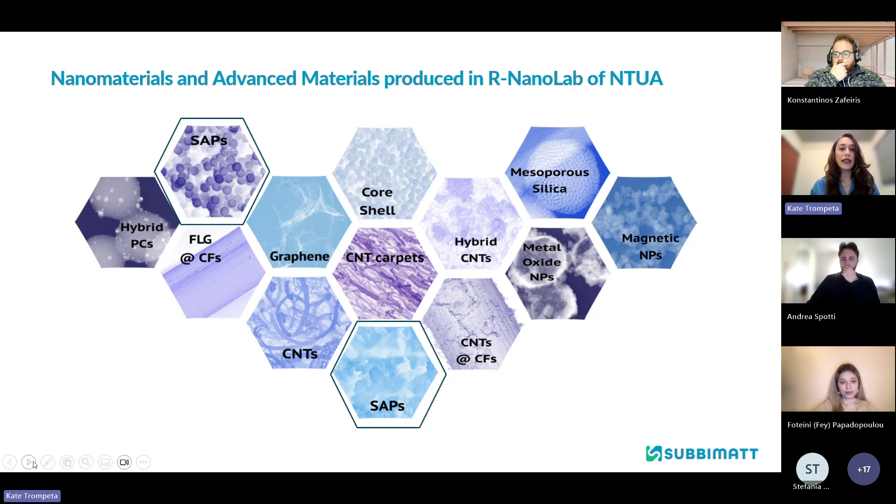So we started with this idea to have a smart textile that can control humidity. And of course, we need specific characterization of the performance of these materials and also for the smart textiles. That's why we also exploit some of our capabilities in materials characterization, specifically structure and surface analysis and several of our microscopies, to assess the performance of the materials. Today we will speak about the rheology measurements. Konstantinos will be the speaker for this testing, and I will show you some of our wettability testing at the end of today's webinar.

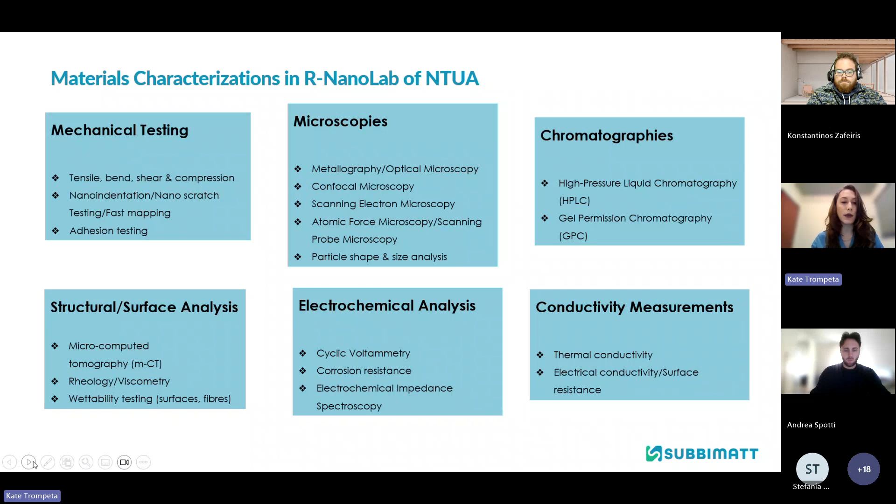So why use thermoresponsive hydrogels on textiles? Temperature is attractive as a trigger because it's simple, reversible, and directly relevant to wear and comfort. A hydrogel can translate the thermal stimulus into a change in water content and conformation. That molecular change can be felt macroscopically as a change in wetting, permeability, or adhesion. So the textile stops being just passive and starts responding to its environment. What we do is exploit the temperature input, the differences in our body with respect to the environment.

So to take, for example, the heat from our body, which is an easy and reversible trigger. The hydrogel can respond, so it can swell or shrink, and also have some surface energy shifts. With this, we have an effect on the textile, and this changes its wetting, its permeability, its adhesion, or the transport of air and humidity through its pores.

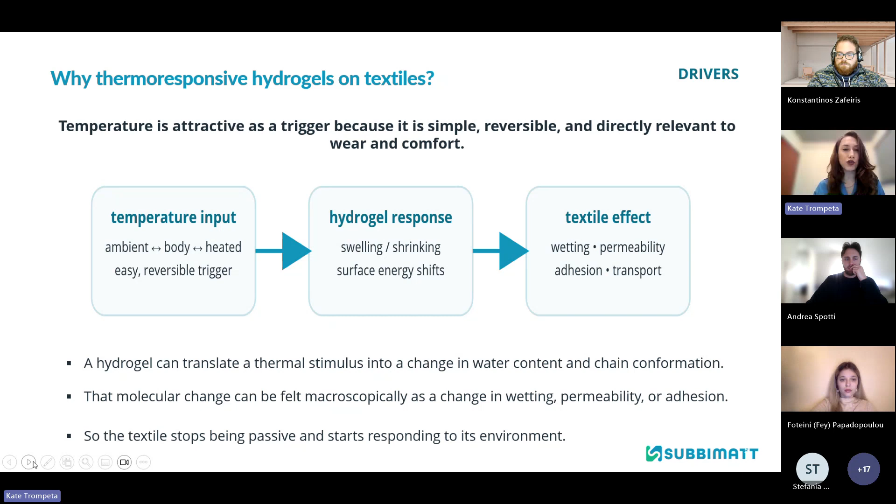The necessary testing is about the textile performance after its functionalization with any material, for example, here the NTR hydrogels. So what we want to check is the contact angle versus temperature and time, its water uptake or water spreading or wicking behavior, the air and water vapor permeability after its coating. And actually, this is the work of Centexbel, the SUBBIMATT coordinator, that is checking the air and water permeability, the repeatability of switching of the actual fabric, and the performance under realistic humidity and bending.

A useful smart textile is not only responsive, it must remain responsive after handling, moisture exposure, and repeated thermal cycles. That's why we need to fulfill the performance and the functionality, but of course, to withstand washing, abrasion, and to check the coating retention, also to have tensile and flexural response during handling, compatibility with other textile functions, also to ensure that the aging stability during storage and use can be fulfilled, and of course to fulfill the safety, comfort, and biocompatibility when this is relevant.

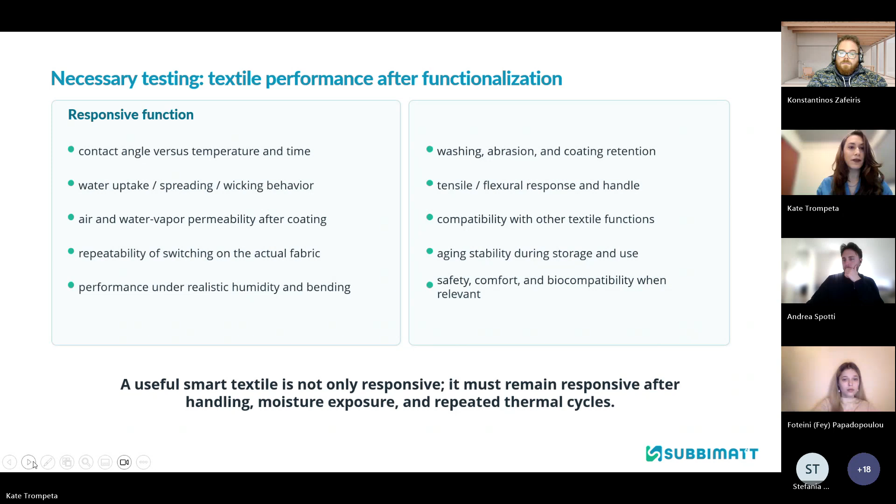I would like to close this introduction by introducing the lower critical solution temperature, which is the property that we are studying actually. What we need to quantify in the responsive phase itself: first of all, the swelling ratio or thickness as a function of temperature, the response time and reversibility over many heating cooling cycles, the thermal transition, chemistry, and morphology after cross-linking, and all these are connected, as you may see, with different parameters. For example, the swelling ratio is a function of temperature. Similarly, it's also affected by the thickness because it shows how much the hydrogel swells or collapses.

The response kinetics are also really important because they show how fast the coating switches. Also, the morphology and chemistry of the fabric itself and also the coating show whether the network is intact after processing. And we have also the cycling stability to show us if the response survived after repeated triggers. Where is the LCST or effective switching window, which is something that can also be identified by the rheological measurements that will be presented next. And also to answer the question on how much coating remains after swelling and drying, which is also a matter of stability.

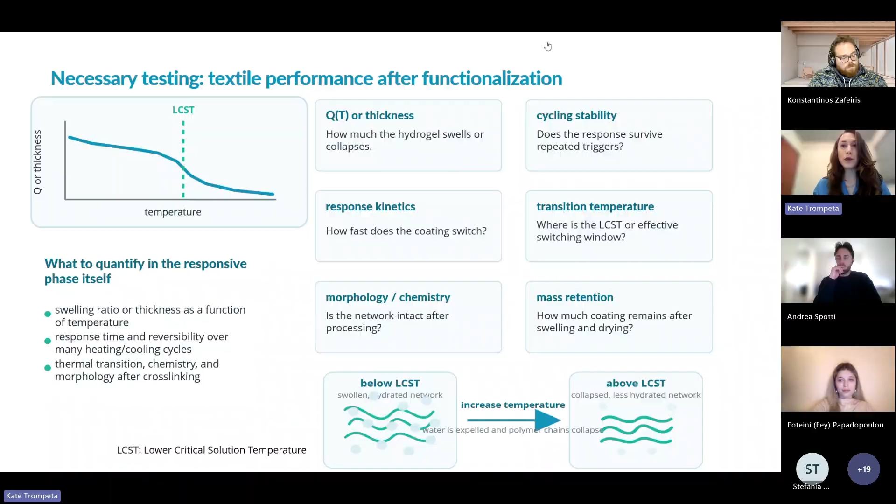So now I will give the floor to my colleague Fey, who will present how she has synthesized the NTR hydrogels and how she was able to identify the LCST. So thank you from my side.

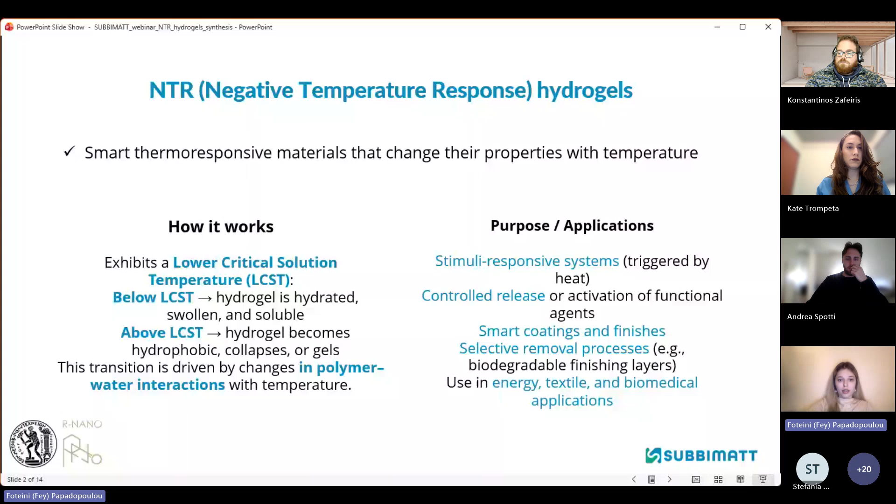So in order to synthesize the NTR bio-based hydrogels, we first need to think how are we gonna design those experiments. So we started with a bio-inspired design approach, selecting the proper raw materials, and formulating the pathway in which we're gonna synthesize and then assess those hydrogels. Evaluation was a very important step in that. Evaluation of the LCST, the solvent systems, the temperature, the processing conditions, in order to validate the material performance and then consider the scale up.

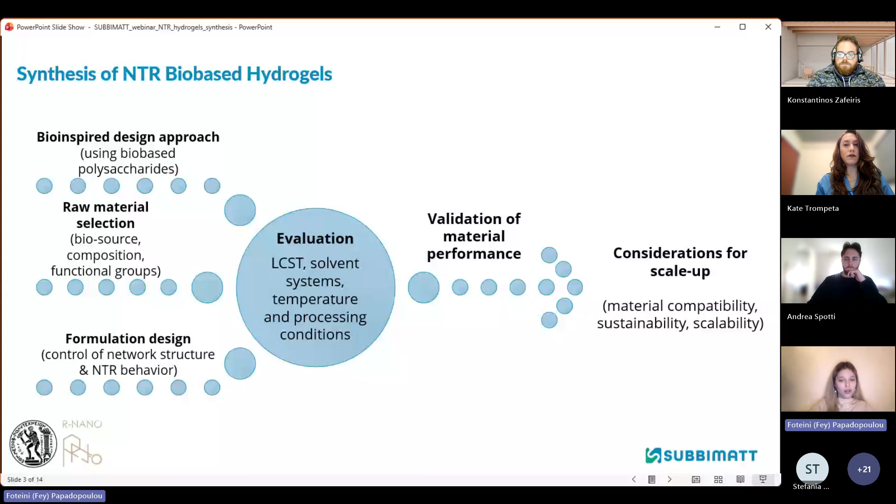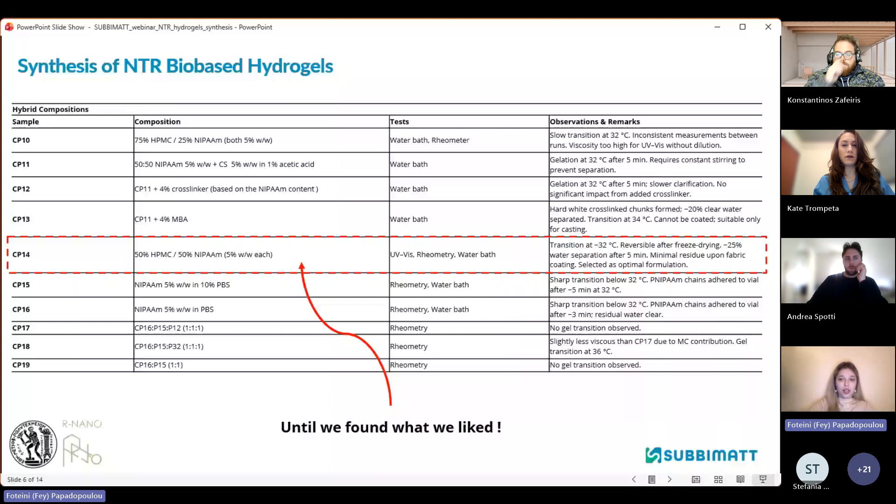So we started testing, and we did a lot of testing, and we continue testing, as you see, until we find a synthesis that we liked. The synthesis was composed of NIPAAm, or N-isopropylacrylamide, which is a thermosensitive polymer that changes behavior with the temperature. It has a very narrow temperature range. It's about 28 to 34 degrees.

Free radical polymerization forms the final network, and for this reason, we have APS as the initiator and TEMED as the accelerator. The initiator and the accelerator are vital because elevating the temperature above the NIPAAm and HPMC transition temperature results in a collapsed polymer network that can't be further processed. So keeping the temperature low, room temperature ideally, or even lower, forms NIPAAm polymer, and mixing it with HPMC hydrogel, we can actually make this hydrogel that looks like this.

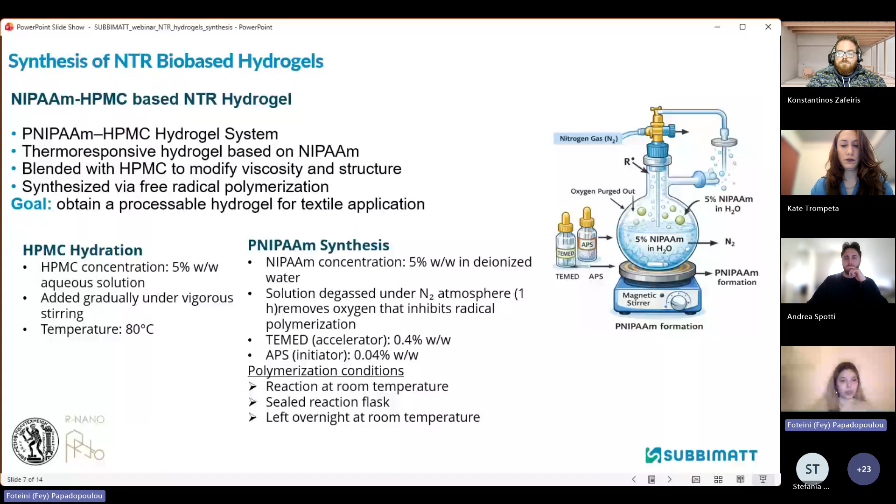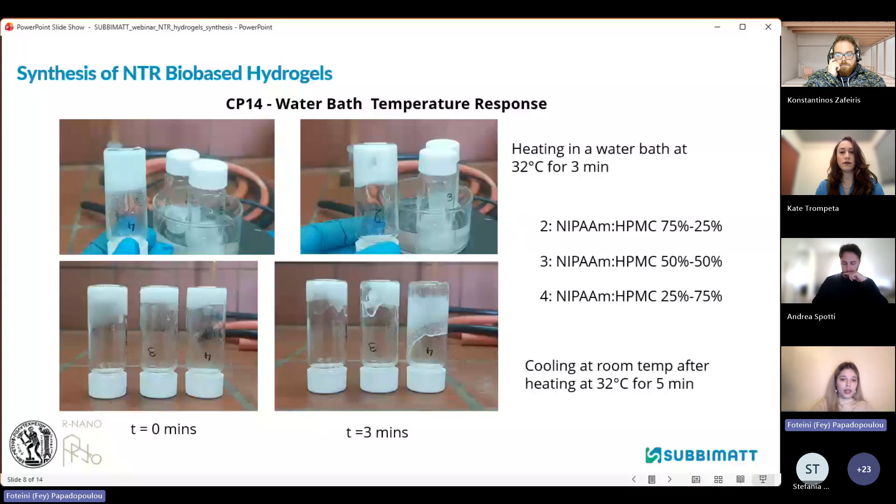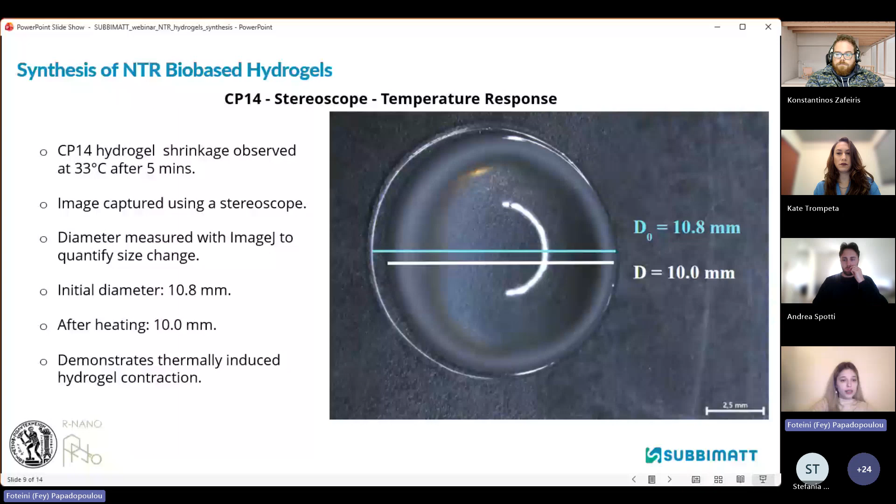So here we have a little droplet under a stereoscope in order to assess this transitioning in this gel formation. We have here a little time lapse, let's say, of the hydrogel during heating. At room temperature, the gel is fully swollen, and as temperature reaches 33 degrees, the hydrogel gradually contracts, and this becomes more pronounced after 1 minute and even more after 5 minutes. This demonstrates the thermoresponsive behavior that our chosen hydrogel exhibits.

And okay, we did it. We tested it. We did multiple variations of that. But what about the procedure? Is it robust? Is it reliable? Can NIPAM and HPMC be mixed thoroughly to replicate this result over and over again?

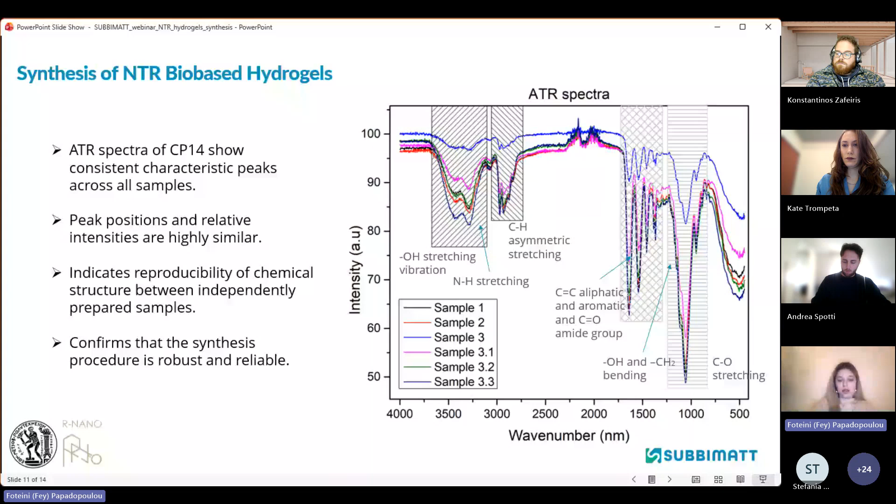And now comes a bit of a difficult issue. How can we graft and secure this hydrogel that we made onto the fabrics? The first route we chose was just to disperse with a cross-linker and see how the fabric reacts. That was not enough. So we tweaked our coating route, let's say, and we immersed our fabrics in the cross-linker, which is MBA.

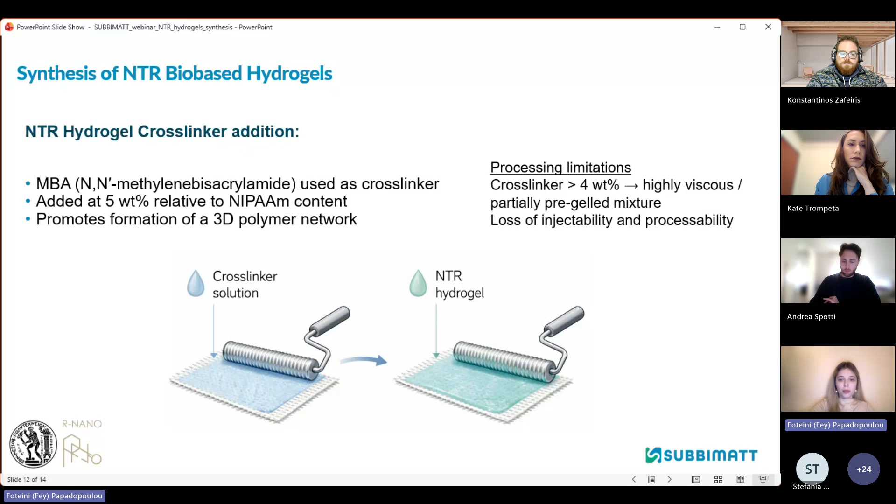We used the relative amount of gel that each fabric absorbs. We did testing on that, and we found out how much the fabric absorbs, and then we used 5% of this onto the fabric directly. Then we layered the hydrogel on top and let it dry completely. This resulted in fabrics that are coated, with the hydrogel fastened onto the fabric instead of just on itself.

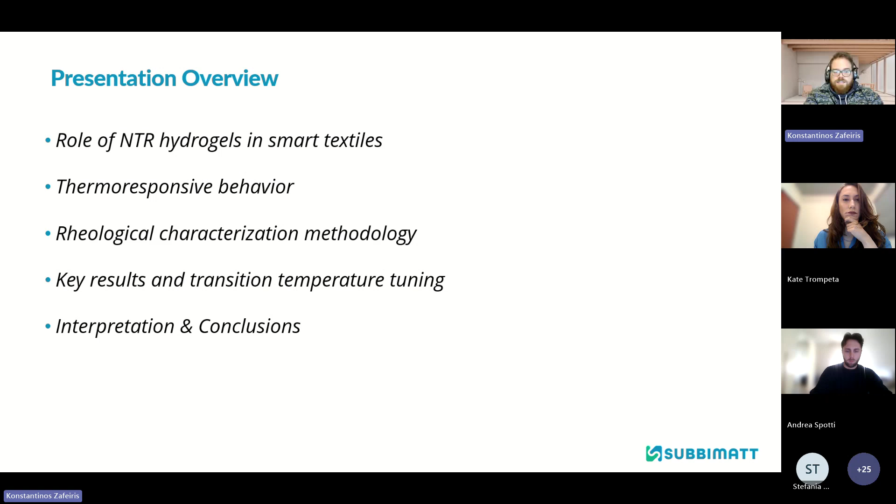So good afternoon, everyone. My name is Konstantinos Zafeiris, and I will present the rheological characterization of the NTR hydrogels developed within the SUBBIMATT project. So I will start with the role of these hydrogels in smart textiles and their working principle, and I will afterwards introduce the rheological methodology that we used in their characterization. And next, I will present the experimental results, starting from fully bio-based systems and the transition to hybrid formulations. Finally, I will discuss the interpretation of the results and some takeaway messages.

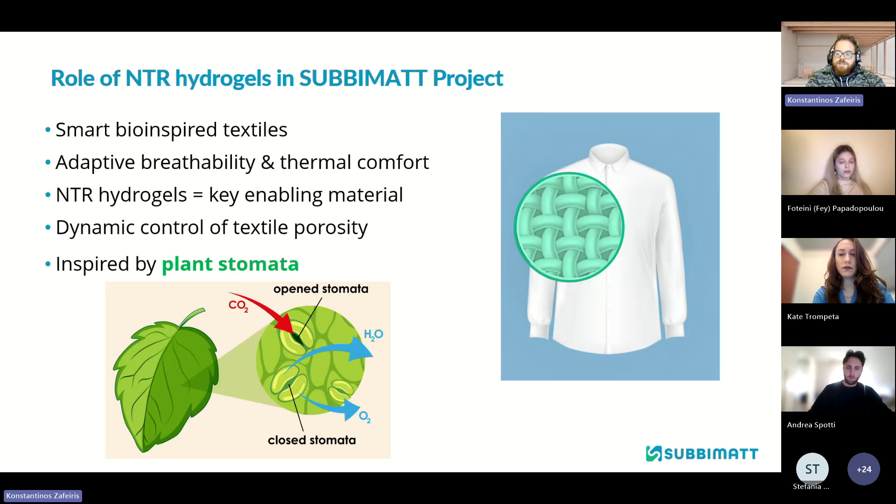So in SUBBIMATT, NTR hydrogels are a key enabling material for smart bio-inspired textiles. They allow dynamic control of the textile porosity, enabling adaptive breathability and thermal comfort. Now, this concept is not new. It's inspired by plant stomata, which regulate gas exchange through opening and closing mechanisms. Now, the hydrogel function is based on the lower critical solution temperature, as we referred before.

So below this temperature, the hydrogel is swollen and, when in a fabric, reduces porosity and retains heat. However, above the lower critical solution temperature, the hydrogel shrinks, porosity increases, and so does breathability. For textile applications such as SUBBIMATT, the critical requirement is that this transition occurs within a range of 25 to 32 degrees Celsius. Now, before presenting the experimental methodology and results, let me briefly introduce some basic rheological concepts that are relevant to hydrogels.

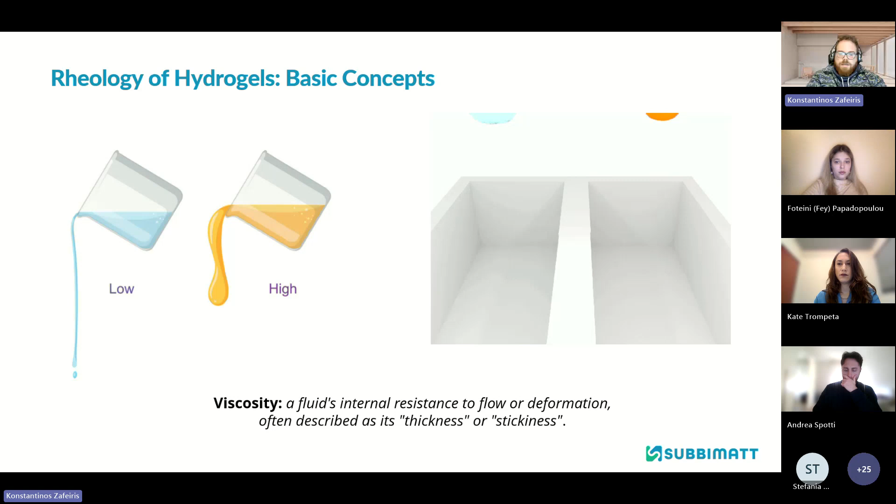Now, rheology is the study of how materials deform and flow under applied forces. Regarding viscosity, it's an internal resistance to flow or deformation, often described as a thickness or a stickiness. So in other words, it represents the friction between molecules in a liquid or gas medium, with high viscosity fluids like honey, for example, flowing slowly, and low viscosity fluids like water flowing quickly. Now back to the hydrogel part.

Hydrogels are viscoelastic materials, meaning they exhibit both solid-like and liquid-like behavior. Now this behavior is quantified using two key parameters: the storage modulus, we call it in brief G prime, that represents the elastic or solid-like response, and the loss modulus G double prime, which represents the viscous or liquid-like response. Now, when the storage modulus is higher than the loss modulus, the material behaves more like a solid, indicating the presence of a stable network. On the contrary, when the loss modulus dominates, the material behaves more like a liquid.

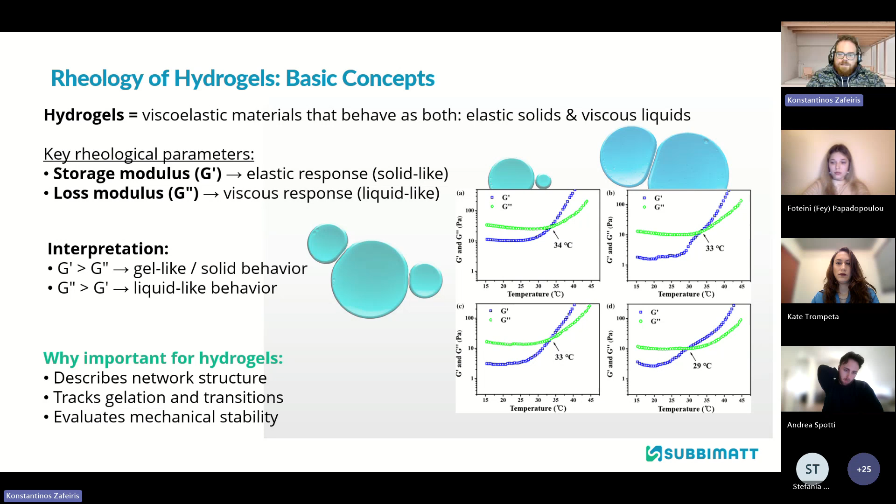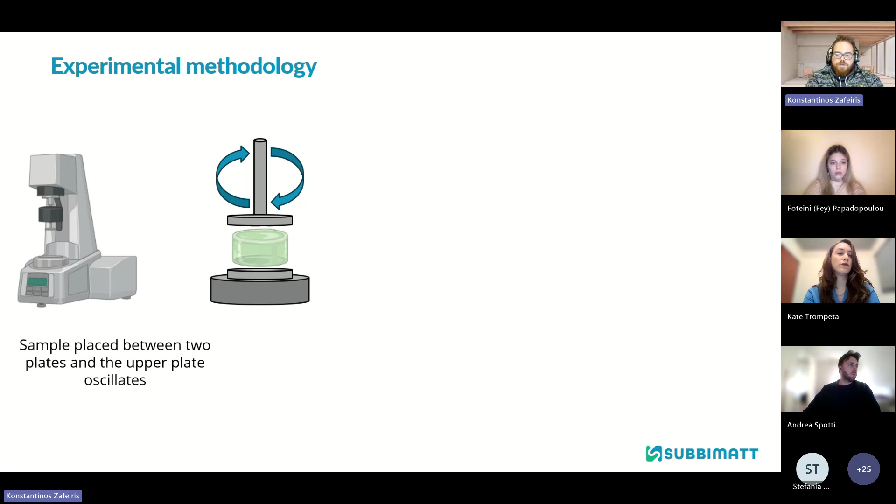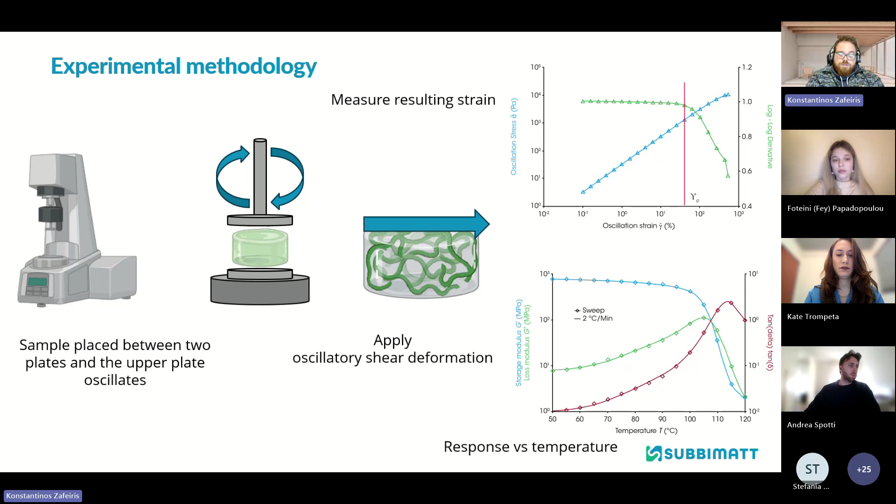Now, these parameters are particularly important for hydrogels as they allow us to understand their internal structure, monitor transitions such as gelation, and of course evaluate their mechanical stability under different conditions. Now, in our experiments, we use a plate-to-plate geometry, as we call it. The hydrogel sample is placed between two parallel plates, and the upper plate applies a small oscillatory motion. This creates a shear deformation in the material, and the instrument measures the resulting stress response. By controlling parameters such as strain, frequency, and temperature, we can probe the material in different conditions. From this response, we extract the storage and loss moduli, which describe the mechanical behavior of the hydrogel.

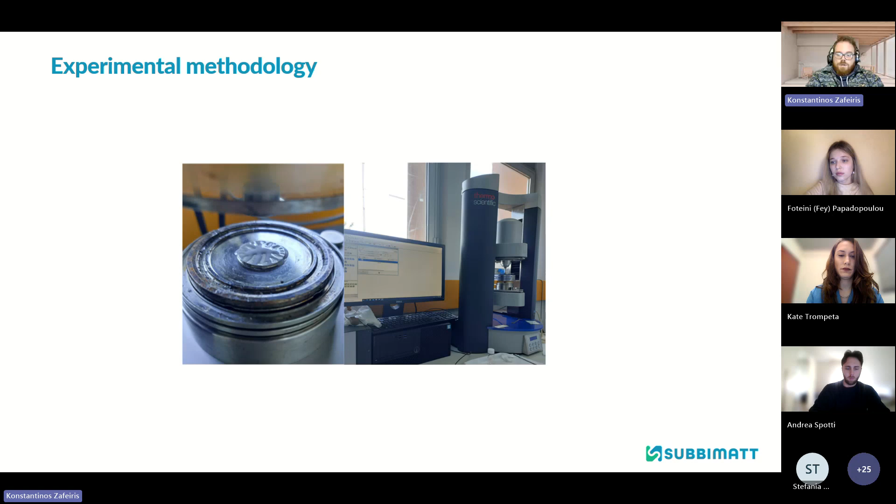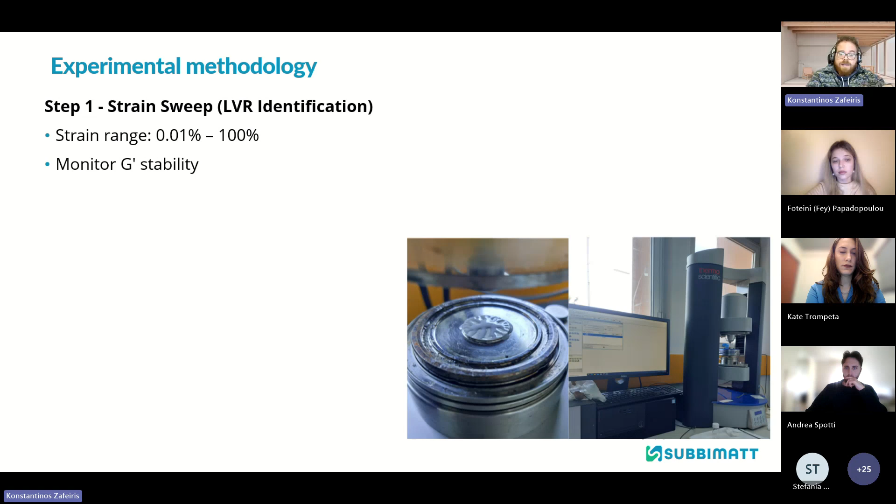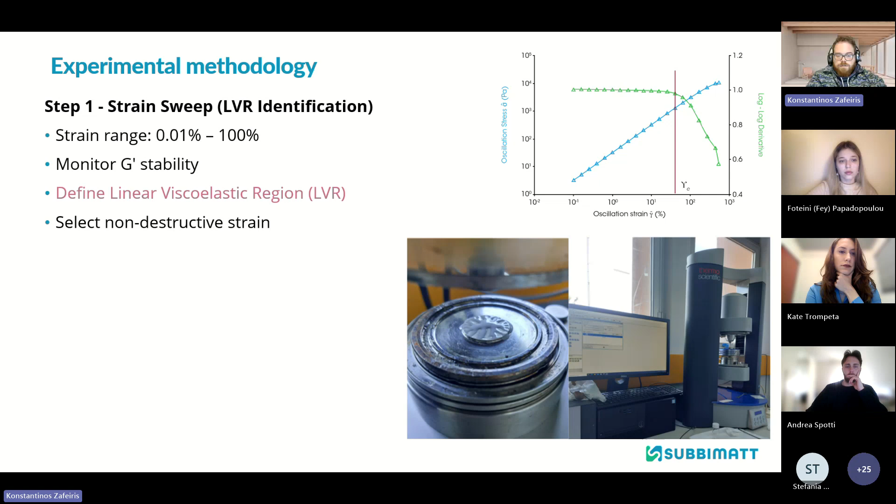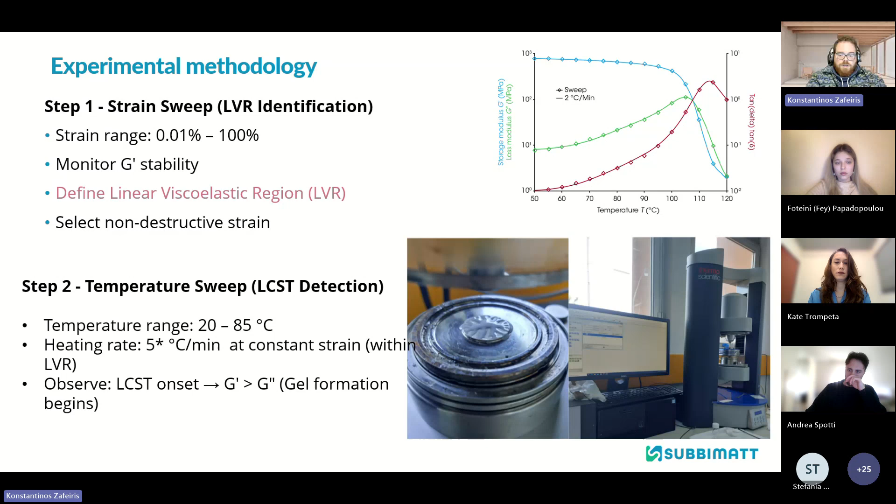We monitor the storage modulus, G prime, which represents elastic behavior, and of course the G double prime, hence the viscous behavior. Now, the transition is identified through changes in these moduli as temperature increases. So let's go to the good part, our results, starting from the fully bio-based systems.

As you can see in this slide, at low temperatures, all systems comprising either methylcellulose, hydroxypropyl methylcellulose, or chitosan exhibit low storage modulus values, which indicates weakly structured networks. As temperature increases, a sharp rise in G prime can be observed in some cases, which corresponds to the thermally induced gel formation. However, the key observation here is that this transition occurs at relatively high temperature, typically between 50 to 70 degrees Celsius, depending on the composition of each hydrogel.

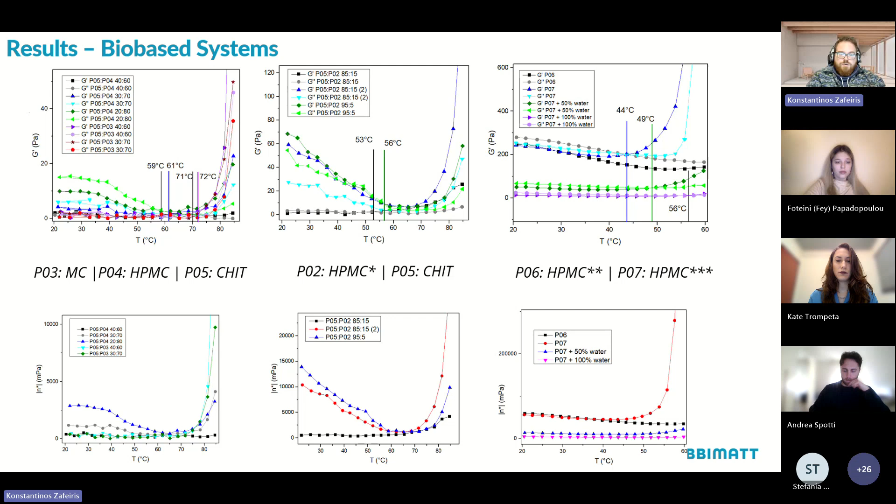Although blending with chitosan slightly affects this transition behavior, it is not sufficient to shift the lower critical solution temperature into the desired temperature range of our application in the SUBBIMATT project. Also, on the bottom of the slide, there are some viscosity data that also confirm the trend we referred to before, showing a corresponding increase at the transition point of the hydrogels. So overall, while fully bio-based systems are proven to be thermoresponsive, their transition temperature is too high for our application, highlighting that we need to experiment even further with our design strategy.

So speaking of challenges, this is an interesting challenge that arises from the previous slide and the rheological measurement. So hydrogels comprised solely of bio-based materials have transition temperatures that are above 40 and 50 degrees Celsius. Even by tinkering with the formulation with chitosan, we could not reduce this transition temperature drastically. So to address this, we followed, let's say, a hybrid approach, and we kept the polysaccharides in our recipes. However, we added a synthetic ingredient, as Fey already mentioned.

So we had a polysaccharide backbone consisting of cellulose derivatives and chitosan, and combined it with N-isopropylacrylamide. So the goal was to achieve precise control of the thermoresponsive behavior while maintaining as much bio-based content as possible. And our compromise was a very good ratio, 50% bio-based content and 50% synthetic. So to overcome these limitations, as we said before, we experimented with these hybrid formulations, and we already mentioned that this was the top performing one and the most promising one in terms of the phase transition temperature.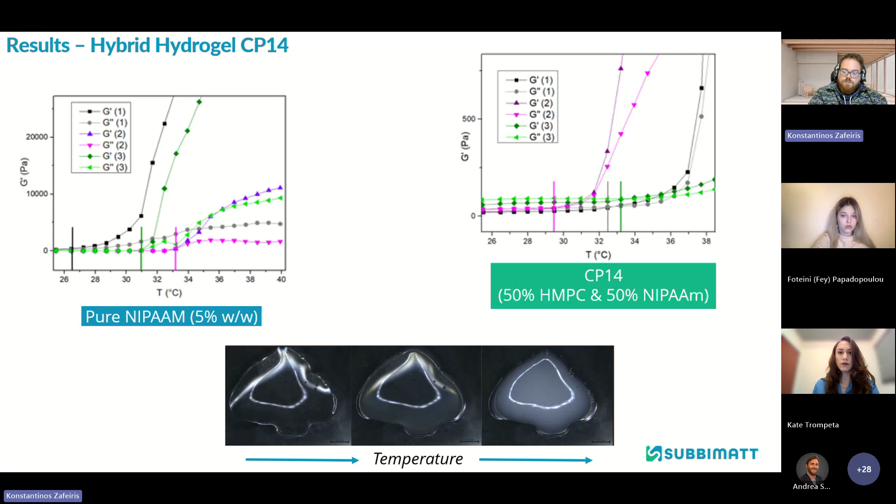So the slight variation that someone can notice in the transition temperatures in the hybrid formulation can probably be attributed to factors such as the inhomogeneity of the sample or some thermal gradients during the measurement itself. So overall, this system successfully shifts the thermoresponsive behavior into our application range. So to sum things up, the observed transition is driven by changes in polymer-water interaction. As already noticed, as temperature increases, the network becomes less hydrophilic, leading to shrinkage and changes, of course, in the mechanical

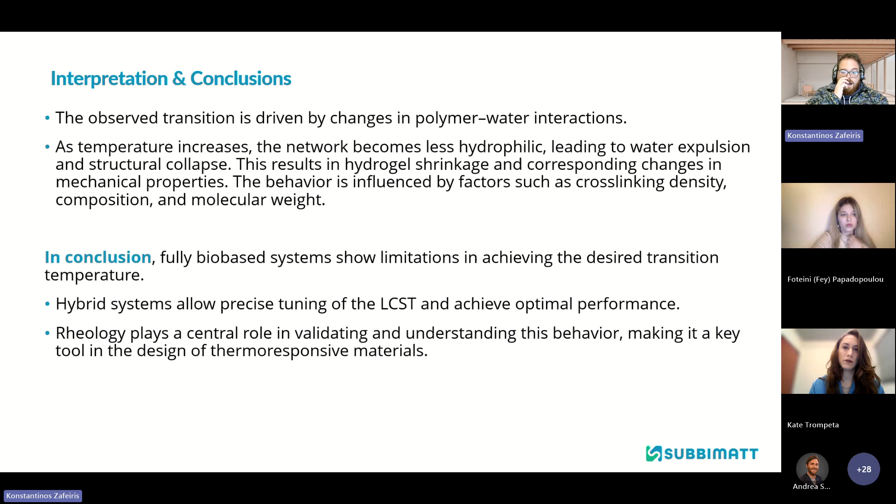properties of the formulation. So in conclusion, fully bio-based systems show limitations when we aim to achieve our desired transition temperature, which is in fact close to the regular body temperature. However, hybrid systems allow precise tuning of our lower critical solution temperature and improved performance. And of course, last but not least, rheology plays a key role in understanding and validating the behavior of these thermoresponsive materials.

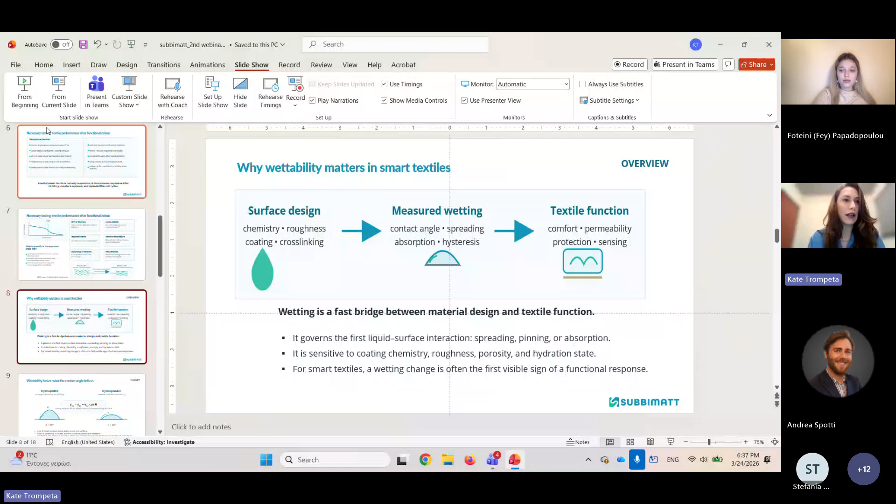You will now have a look at the wettability testing that we do in the SUBBIMATT project. So why does wettability matter in smart textiles? Wetting is a fast bridge between material design and textile function. It governs the first liquid-surface interaction. So we are talking about spreading, pinning, or absorption. It is sensitive to coating chemistry, to the roughness of the textile and the coating, to porosity, and to the hydration state.

For smart textiles, a wetting change is often the first visible sign of a functional response. So we need to study the surface design, its chemistry, the roughness, as mentioned before, of the fabric itself or the coating, and the cross-linking of the material on the surface of the fabric.

So how is wetting measured? It can be measured through static contact angle measurements, through the spreading, so this is a dynamic testing, on its absorption or possible hysteresis. With this, we could understand the textile function to quantify its comfort, its permeability, possible protection, and also some sensing in some cases.

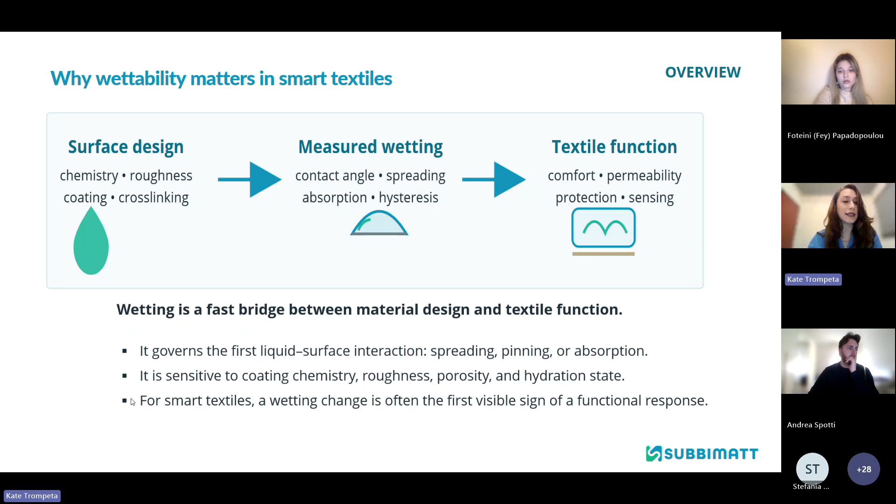So we need to know a few things about the wettability basics and what actually the contact angle tells us. All the phenomena is guided by the Young equation. So actually we separate the materials to hydrophilic or hydrophobic. We could also have superhydrophilic or superhydrophobic cases. For a hydrophilic material, we have stronger solid-liquid affinity. And for a hydrophobic material, we have weaker solid-liquid interactions.

The Young equation actually combines the surface tension of the solid with the liquid, or the solid with the gas, or the liquid with the gas. So actually we are studying the triple point within three different phases of materials. And the connection point of all of them is the theta angle that can be measured through the contact angle measurements. A low theta means that the liquid spreads more easily across the surface. A high theta means that the spreading is limited and the surface appears less wettable.

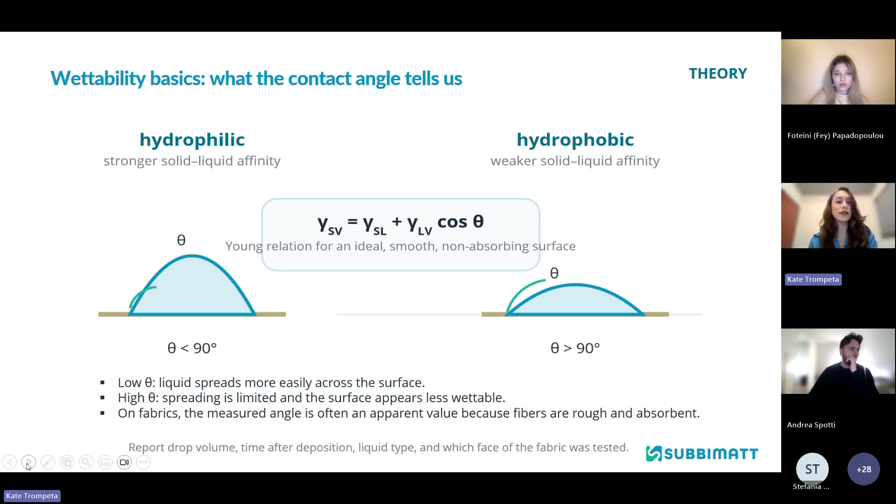On fabric specifically, the measured angle is often an apparent value because fibers are rough and absorbent. So every time that we are making a measurement, we need to report the drop volume, the time after deposition, the liquid type, and which face of the fabric was tested. For you to understand the theta, it's actually the tangent on the triple point between the liquid, the solid surface, and the air.

So how do we do this type of measurements, especially on textiles? We have a flat surface where we place on it the textile. We try to keep it flat, and then we dispense a defined droplet. We need to calculate the volume of this droplet in order to be able to drop and have a sessile drop on the surface of the fabric. Afterwards, we capture the droplet profile and try to fit the angle with a specific software on the machine that we have. Most of the times we have to fit both the left and right contact angle.

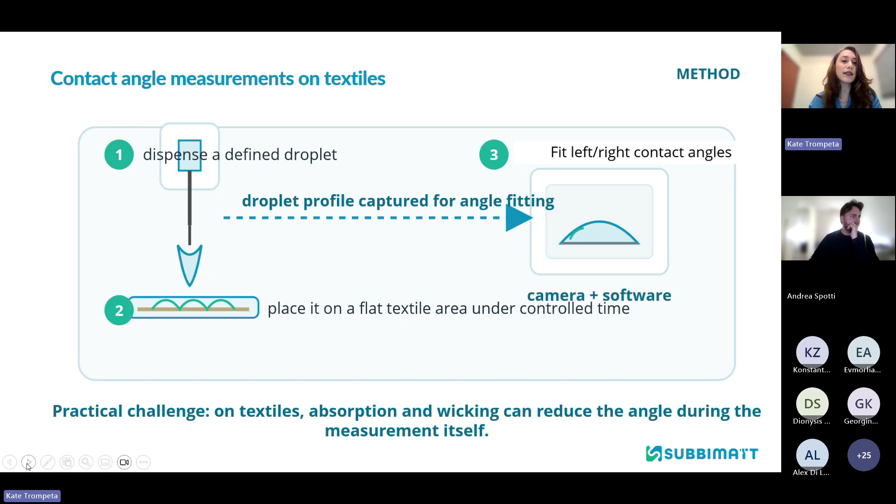On textiles, we face a practical challenge, which is the absorption and wicking that can reduce the angle during the measurement itself. So actually, we cannot always have static measurements, but most of the time dynamic ones, and study the phenomenon at specific time intervals.

Let me see. Yep, let's proceed to the next.

So what controls the measured angle? First of all, the surface chemistry. Polar groups raise affinity to water, while non-polar ones reduce it. Then it's the roughness and porosity of the fabric. The fabric texture amplifies apparent wetting and can accelerate imbibition. The coating continuity is also very important. So if we have a patchy coverage, this can give a mixed wetting. Also, stronger cross-linking can stabilize the finishing.

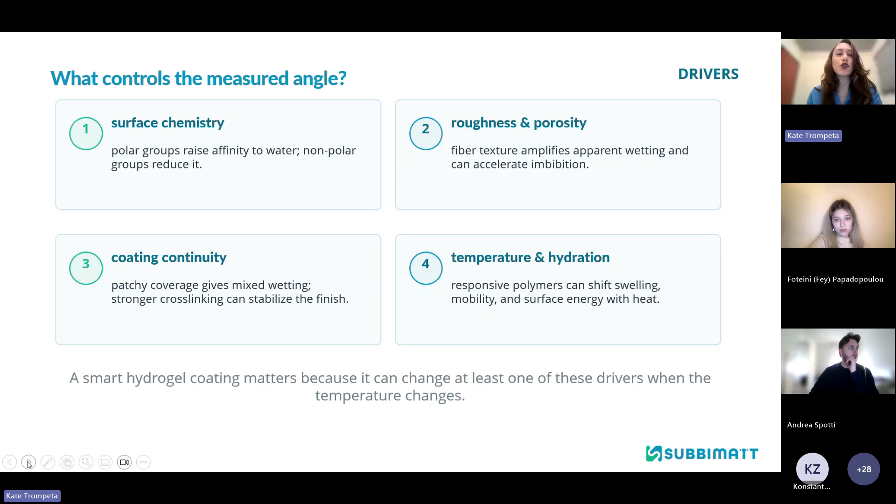We start with the dosing, which means that we are using a syringe to deposit a controlled volume, typically from 1 to 20 microliters of the testing liquid. Most of the cases, this is water. If we want also to study other phenomena, we can use some specific solvents, especially when we want to determine the surface free energy. So we are spreading or dropping the drop with a specific syringe or a specific volume on the surface that we want to study.

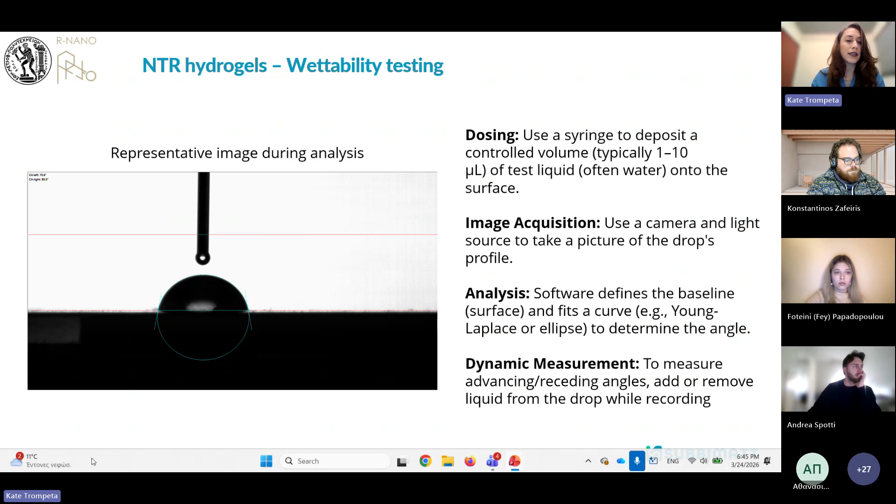In a dynamic measurement, we need to measure the advancing or receding angles and add or remove liquid from the drop while recording. That's why in these cases we're taking a video and then try to make calculations during the whole procedure. So what we could see also in our case in SUBBIMATT: in the first case, when we have a fabric sample that's not treated, you see that we can have a drop at 0 point, and after a while, the water is totally absorbed, so we cannot observe the drop anymore.

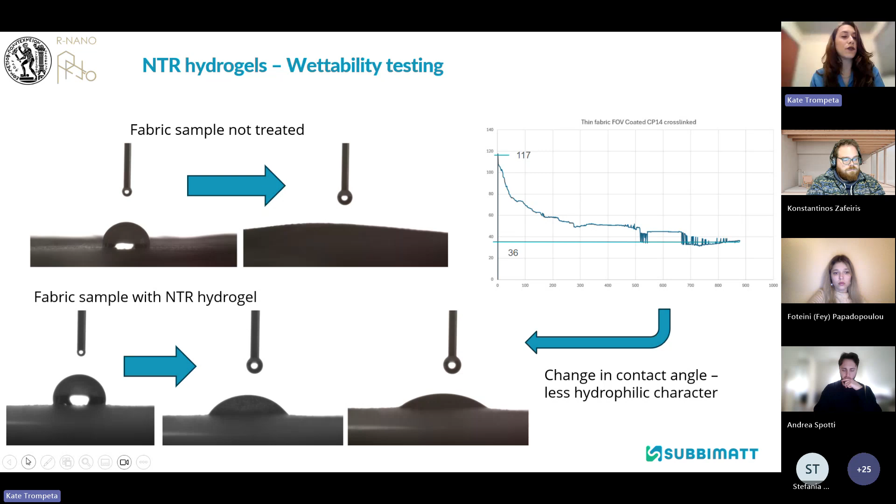When we have coated the fabric with the NTR hydrogel, we can see that we have like a waterproofing function. So in the beginning, the droplet has been absorbed, but as the time passes, it still remains on the surface. So the change in the contact angle that can be recorded also in the diagram shows us the hydrophilic or hydrophobic character versus time. So it's a dynamic measurement. By this, we are able to see if our coating with the hydrogel was effective, not only in terms of their functionality, but also waterproofing if this functionality is also needed.

So we would like to close this presentation with some applications for smart textiles with NTR hydrogels to understand a little bit why and where we can use this type of materials. And this is, for example, in adaptive moisture or heat management. Thermally triggered wetting can help textiles regulate liquid spread and comfort. On controlled permeability or filtration, where responsive coatings can tune passage of water or other fluids with temperature.

On biomedical dressings and transdermal systems, where hydrogel-coated textiles can support moist interfaces and on-demand release concepts. And on wearables, sensing and actuation, where temperature-sensitive layers can combine with conductive or structural textile functions. And in this case, these materials can be combined also with carbon-based nanomaterials.

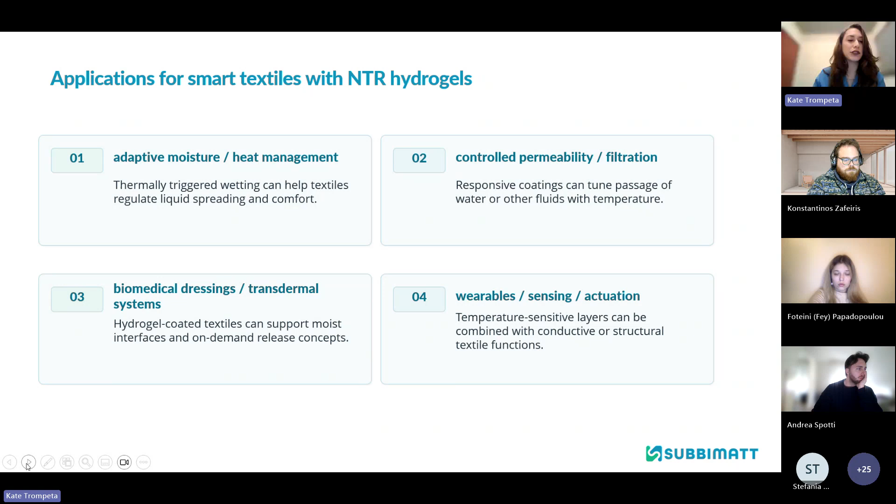So the take-home message of today's webinar is that contact angle is a simple but powerful surface readout. It gives a fast way to see whether a smart coating changes how the textiles meet water. Negative thermoresponsive hydrogels convert temperature into functional surface changes. For LCST-type systems, a higher temperature can collapse the network and shift the apparent wettability.

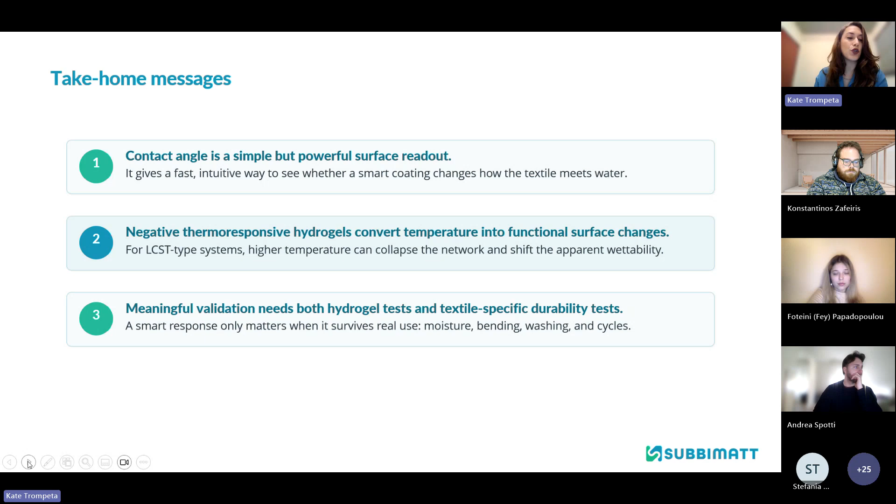And a meaningful validation uses both hydrogel tests and textile-specific durability tests to understand how a smart response works, and it only matters when it survives real use, which is moisture, bending, washing, and withstanding several cycles of use.